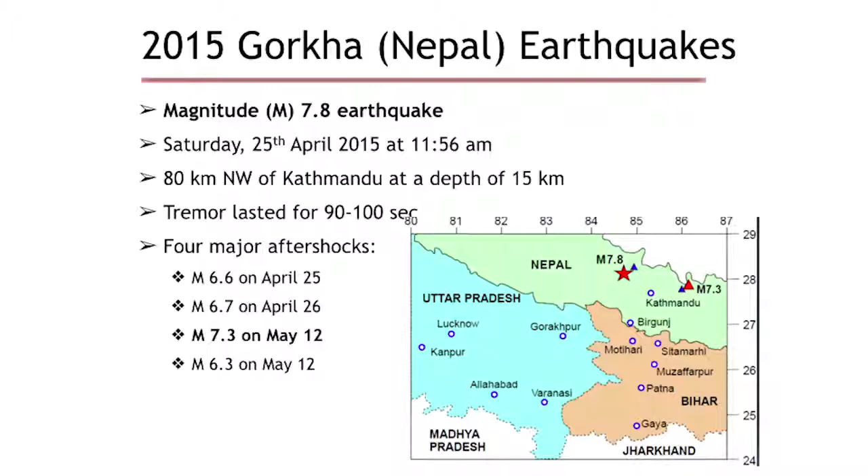And talking about the magnitude here, this is Kathmandu, the capital city here, and the major earthquake, the first earthquake is there, and then all the areas ruptured, and then the second major aftershock is there, 7.3, which is northeast of Kathmandu, again with a similar distance.

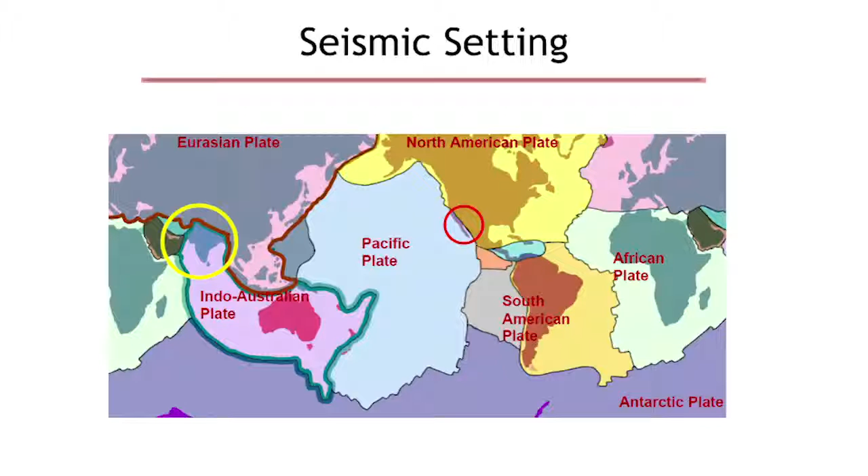Talking about the context, or in terms of seismicity, Nepal lies in the plate boundaries between the big plate of the Indo-Australian plate, which is very active and moving towards north, and it converges with the Eurasian plate, which is relatively stable. So there is a collision there that creates earthquakes, as we have here in British Columbia, with the Pacific plate and North American plate, where we are expecting a large subduction earthquake. It's a similar setting here.

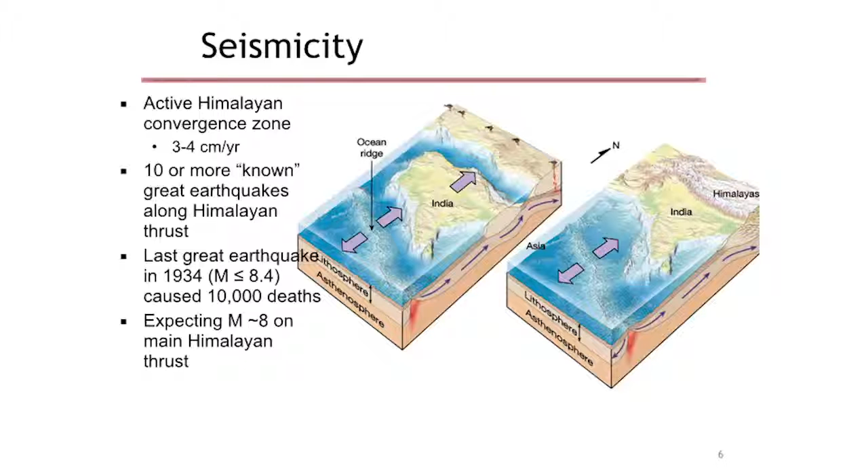And if we look at past earthquakes, yes, there is a history there. In the last 8 centuries, there are about 8 major earthquakes exceeding magnitude 8. So that means, yes, it's an earthquake zone. But compared with other areas, for these large earthquakes, it's very high consequence and a little less frequent, we'd say, because a large earthquake happens every 80 to 120 years. And exactly in 80 years we had this one, because the last one was in 1934, killing almost 10,000 people that time.

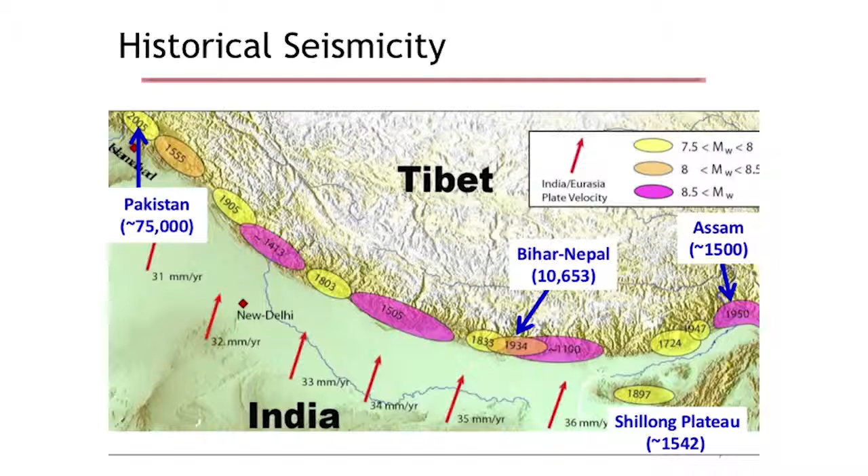And you can see that whole range of the Himalayan range here. You can see earthquakes from the 14th century all the way to the last one in 1934, where Kathmandu is close by. This time the earthquake happened again in the same area, partly filling the gap, but overlapping with the 1833 earthquake rupture area. Still, there is a large area remaining untouched for the last 500 to 600 years. So that means it's not the last earthquake. It could happen again, the big one there.

Just talking about Nepal's geography and demography here: the whole country is divided into 75 districts, and out of those 75 districts, 31 districts are affected by the earthquake, and out of that, 14 districts are severely affected. Among that, 7 are hit hard in terms of casualty and lots of damage. Kathmandu, the capital city, was not in the very highly affected area, but still, being an economical and cultural capital, it was hit hard by the earthquake.

More casualties are in Sindhupalchok and Gorkha districts, where our mission has been to see the damage and to talk with people there.

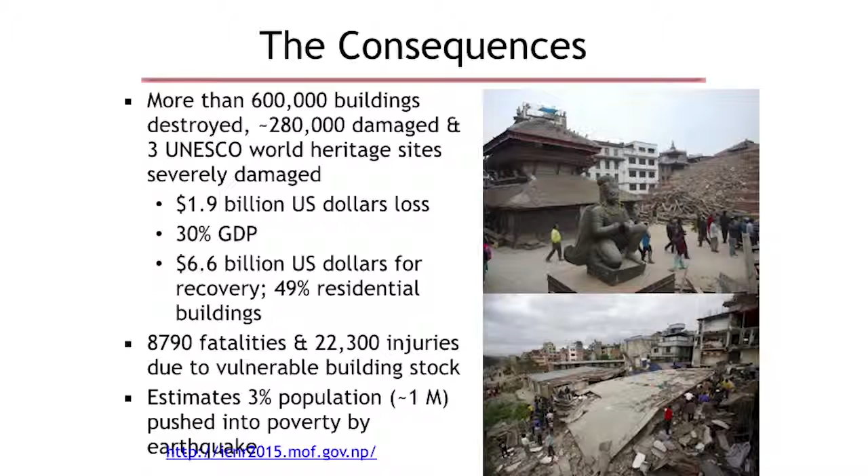In terms of consequences, yes, when it comes to casualty and also the percentage of GDP, it's very high. The economy of Nepal is very small, so even if it's $1.9 billion direct loss, that's still 30% of GDP. In terms of population, 3% of the population is expected to fall into poverty just because of this earthquake. And when it comes to population relative to the size of the country, it's as small as 1/5 of BC, but as big as Canada in terms of population, almost 30 million, close to 28 million. It's a very crowded place, so when an earthquake happens right there, the exposure is very high.

You can see the damage to the infrastructure, the heritage structures there, and damage to concrete buildings. In emergency relief, it was a very hard task for emergency responders because of the topography and the nature of the landscape there. It has high mountains, and the earthquake happened in a very high mountainous region.

So it is so hard to bring all the emergency supplies to people in remote areas. There are a number of places which don't have any access to road, so all the relief materials had to be airlifted by helicopters. That was the only means.

But still, the resiliency of the system is that the army, police, and civil servants reached almost every village within a week. The community itself had their own set of mutual help, self-help, cooperation and trust and confidence building. There was no major secondary human kind of looting or anything that we have seen in other parts.

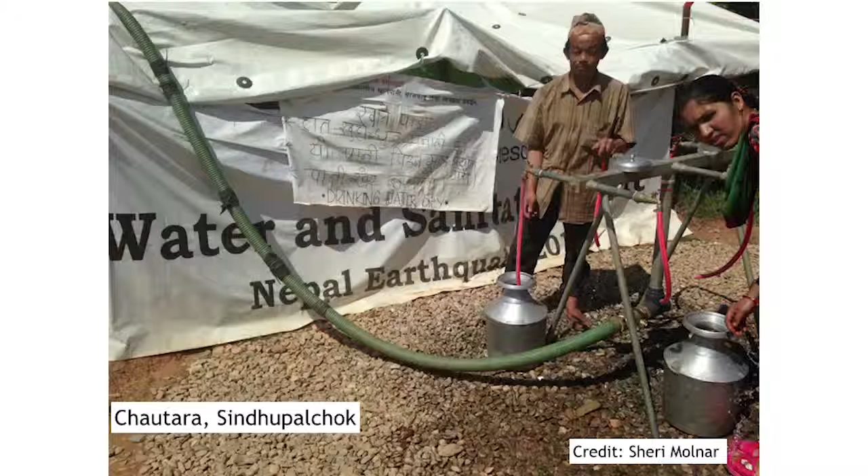You can see that drinking water, and it is written in Nepali. I can read it, and it says that this water is just for drinking. Water is not available for anything else. So that is the situation.

That was the scene that we have seen, and now we want to go to the building constructions and other damage here.

Thank you, and pleased to be here and have the opportunity to share a story from first-hand experience being in an earthquake. This is not the first earthquake I've been to - I've been to a few, most recent one. Before this was in 2010.

I went after the magnitude 8.8 Chile earthquake, and the scenes I've seen in Chile are very different than the scenes I've seen in Nepal. The extent of damage - even though it was an 8.8 magnitude earthquake, only 520 people died. I visited the damaged area extensively, but it was nothing like Nepal.

Also talking about building construction, I just want to say that going after an earthquake, there are aftershocks, and in fact they had been expecting to see an aftershock of magnitude between 6 and 7 once again, before within a 4-month period. So we were there after a month and a half, and we could have experienced that.

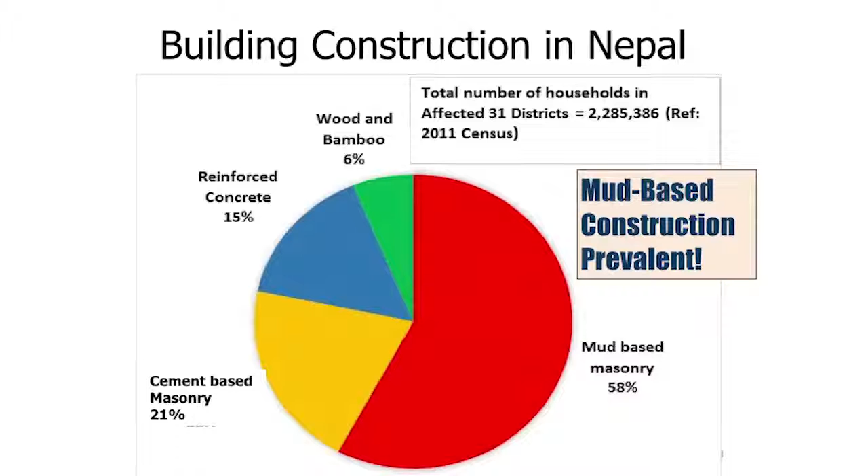Talking about building construction in Nepal, most of it is, as you can see here, information from their census. The way they classify the census is you can see cement-based masonry and mud-based masonry. What it all means is just the type of mortar in masonry. It's not that mud-based masonry is all adobe or mud-based block masonry construction, but it means that they are mostly with mud.

So taking that cement-based and mud-based masonry, you can get that 80% of construction is out of masonry one way or the other, and then 15% is reinforced concrete, those modern buildings that Bishnu will be talking about later, and then wood and bamboo, more traditional construction, 6%. So mud-based construction is obviously prevalent.

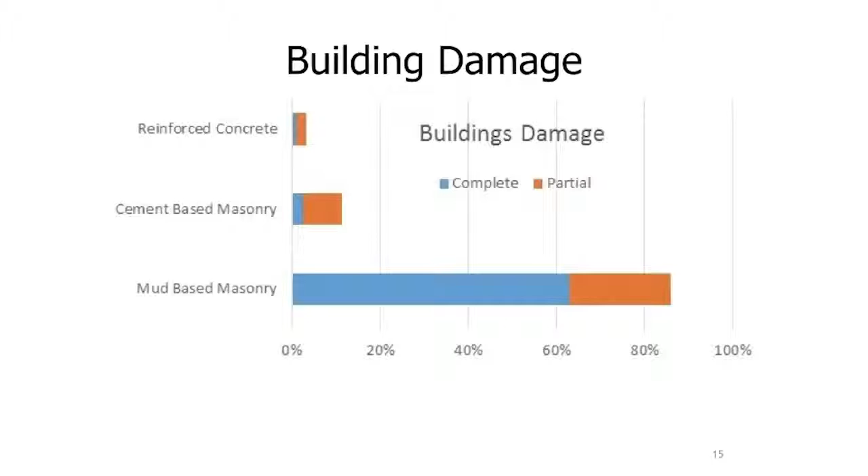Talking about the damage to this type of buildings, mud-based masonry, you can see blue lines show complete damage, and orange or brownish partial damage. You can see prevalent damage or collapse in mud-based masonry, much less in brick masonry or cement-based masonry, that means more modern masonry construction, and then a little bit in reinforced concrete, much less than either of the masonry construction practices. So that is what we have seen.

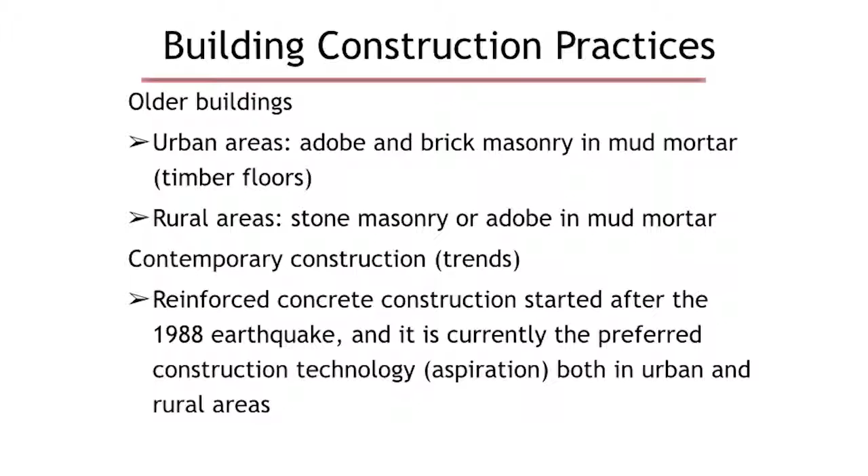Talking about practices, what we could see by visiting towns and villages is that most of the urban, older buildings, in urban or old urban cores, such as downtown Kathmandu, you can see adobe buildings or brick masonry buildings in the cities. If you go outside in those hilly areas, these are stone masonry because that's all they have. They have nothing but stone, and that was the major culprit in the earthquake. And then there's a prevalent trend everywhere where there is cement available and steel to use concrete construction, in most cases inappropriate and not in a very knowledgeable way. So that is what we could see.

In terms of building codes, before I show you some photographs of damage and explain them, building codes were first introduced in Nepal in 1994 in response to the 1988 earthquake, which Bishnu didn't show on that slide, sorry, because it was not as strong. That slide showed magnitude 7 and higher.

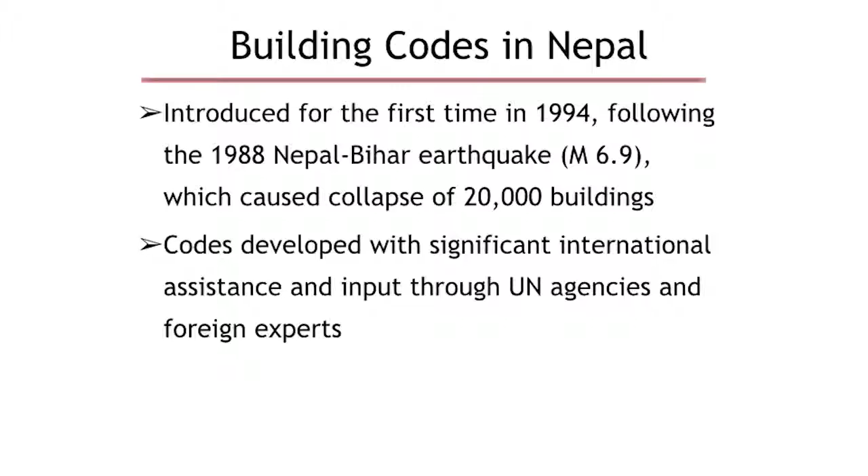This was 6.9, however, it caused the collapse of 20,000 buildings, and it turned out that concrete buildings performed better, and therefore whoever could abandon masonry buildings or build new buildings, they would use concrete construction without proper guidance or codes. So in 1994 they introduced codes, and they were mostly introduced with the help of foreign experts and the United Nations, and they were never renewed or updated until 2015.

Also, even more importantly, they were not implemented. They were not enforced in most cases. So by looking at the concrete building, it doesn't mean it was done according to a code. You only know it is a concrete building, and because it was already constructed, you also don't know how it was constructed. So it's lots of unknowns and very difficult to assess performance, unlike Chile, where you know if the building was done according to the code.

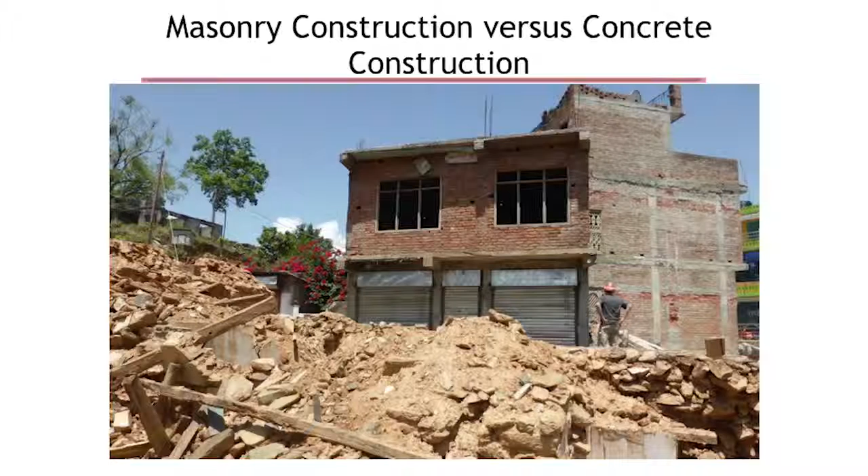So what we could see mostly in terms of performance of masonry construction versus concrete construction is that we could see lots of scenes where concrete buildings withstood and then masonry was damaged or collapsed, as a typical scene.

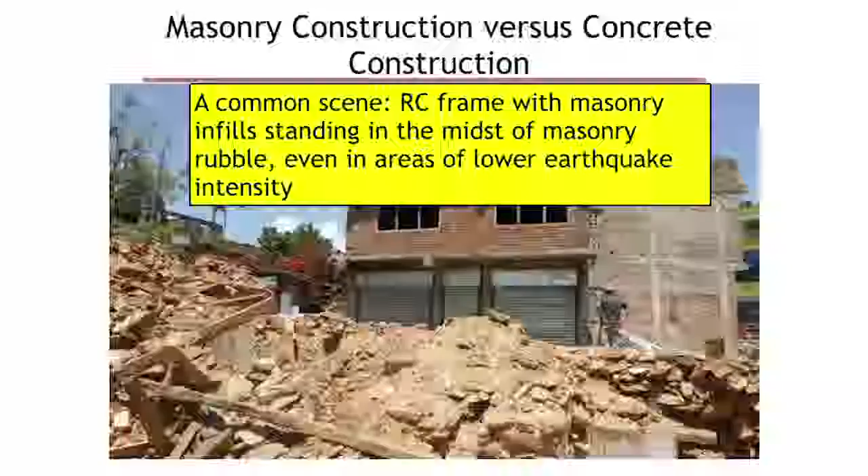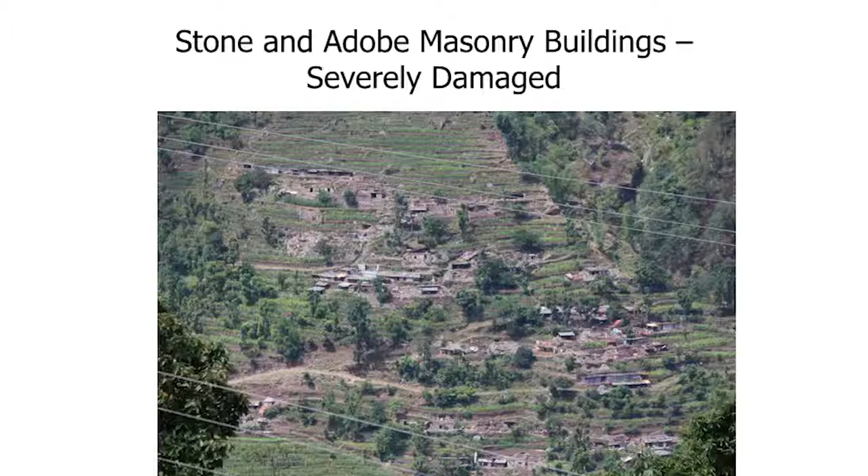Then also in the rural areas where we went outside Kathmandu, this was a typical scene, and this is the photo that we took, but there were much more dramatic photos. It's complete devastation of the villages. You could just see piles of masonry, of stones, instead of the buildings or the houses. So it's horrible.

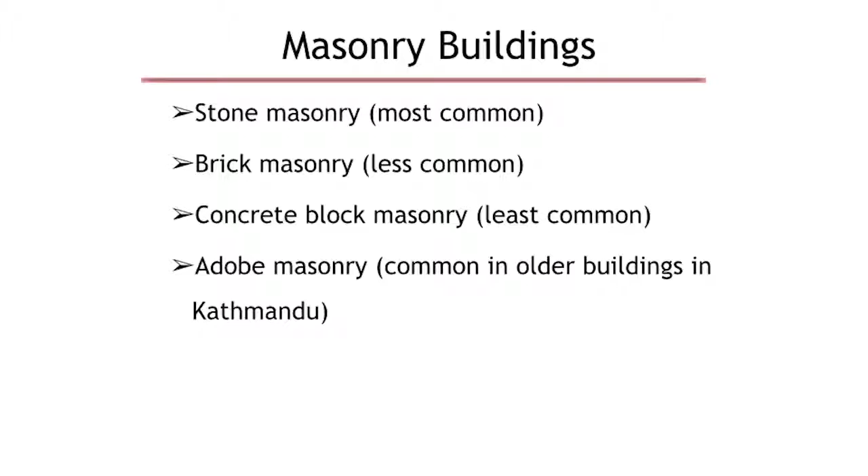So masonry buildings, as I said, stone masonry, I will talk about that, most common in the rural areas. A little bit about brick masonry, and concrete block masonry, less common, and adobe - I'll not be talking about that because most of them actually collapsed. So in terms of stone masonry housing, this was the most prevalent rural construction practice in Nepal.

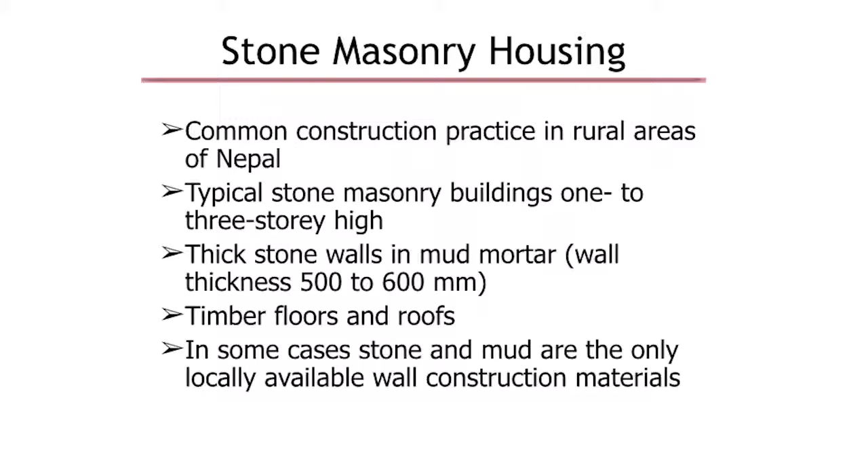Typically 1 to 3 story buildings. You can see how they look like. This is a typical well-built stone masonry building, and it survived the earthquake obviously. You can see pitched roofs, light roofs, which is good. They have some metal roofing usually, and timber floors.

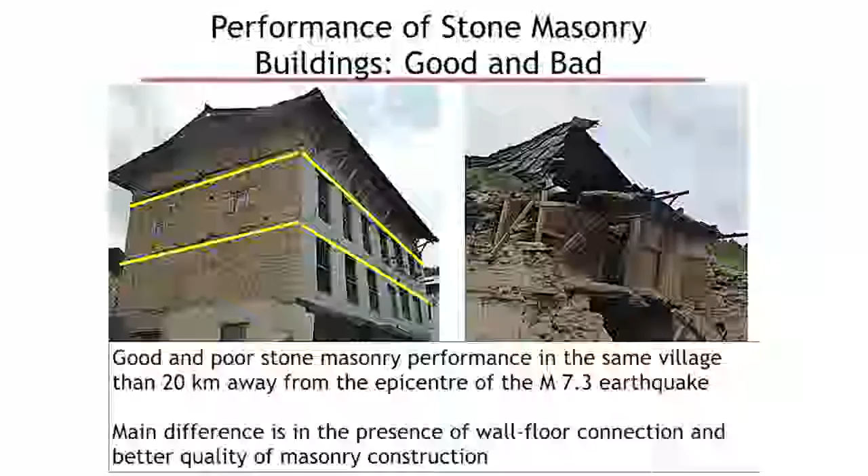I think I should keep speaking to this somehow, the voice is not clear all the time. So this is a timber floor, as you can see. So they don't have too much of a diaphragm action, which means something to earthquake engineers. And inside the floor, you can see the planks and system.

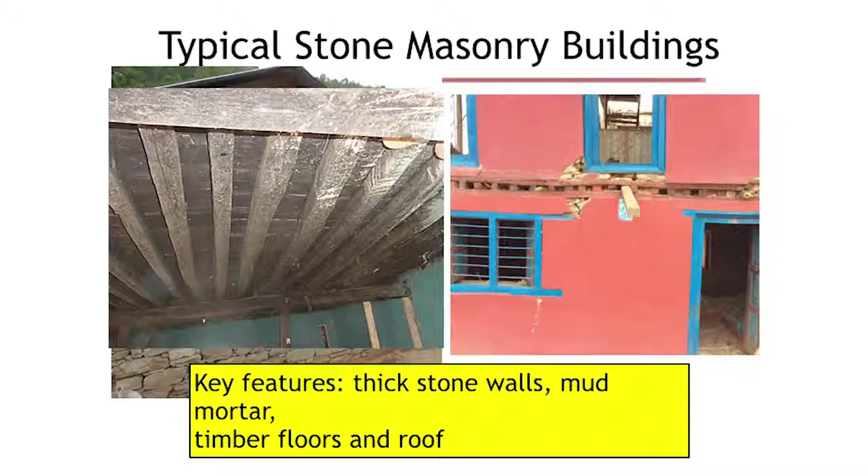So we could see both good and bad performance of stone masonry buildings. One would think with this type of construction you could see all collapse, but we have also seen good performance. For example, this is on the left side, you can see a building which, they're in the same village.

They were very close to the epicenter of the second earthquake. The one that had timber elements, like ring beams, which was a traditional practice for many years, performed quite fine, and we've seen other buildings like that. Whereas others built more poorly without those elements collapsed or were badly damaged. So, taking us back home, we do have similar stone masonry buildings.

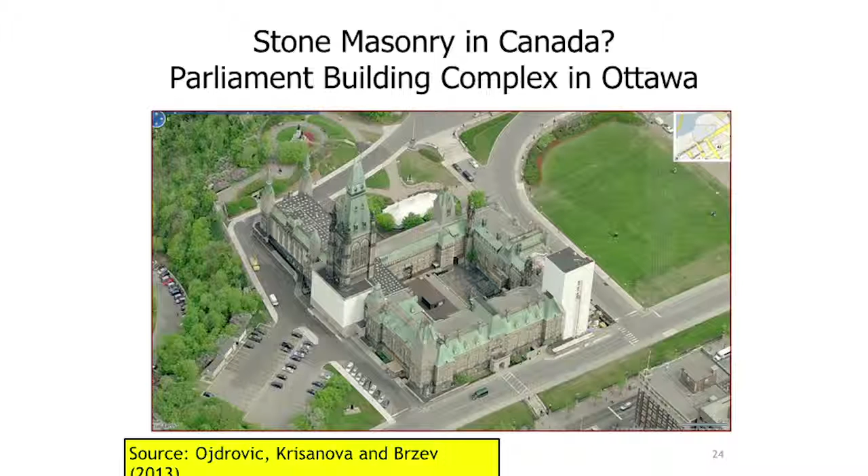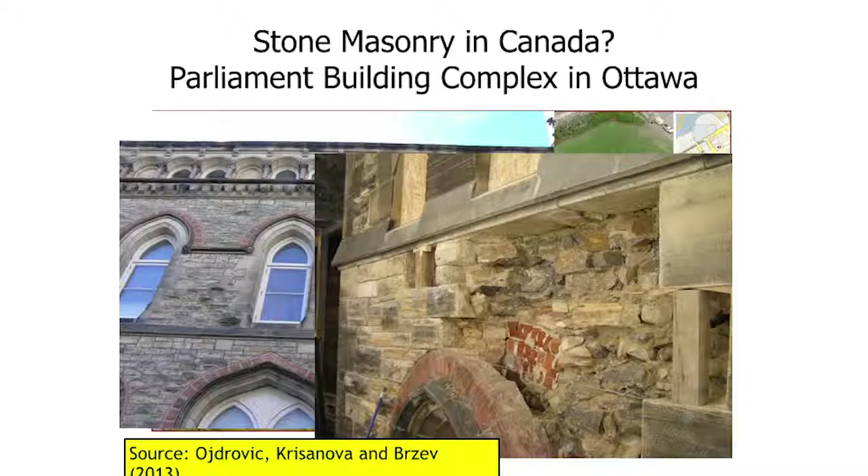They look much nicer though, and more monumental, like the Parliament building in Ottawa. But when you look inside, I was working a bit on reviewing part of the rehabilitation project, which has been going on for many years. There are stone walls of poor quality, similar to the practice we saw in Nepal. So there is some similarity there.

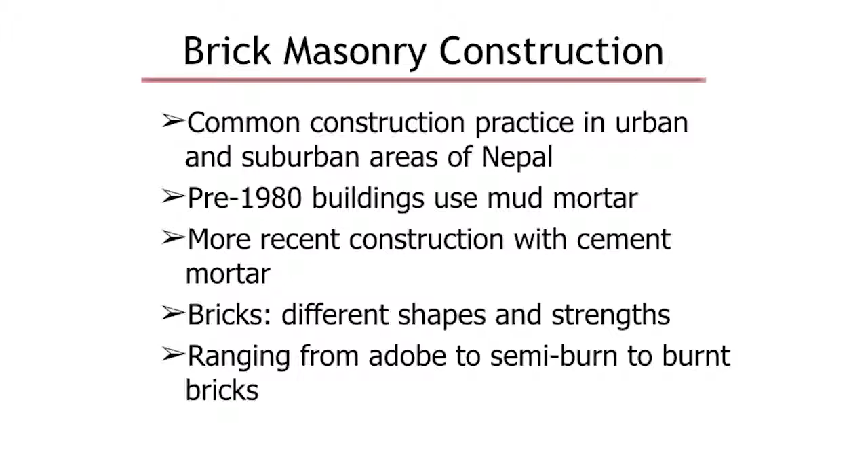In terms of brick masonry, this is similar to what we have here in older buildings in Vancouver and other cities in Canada. Mostly before the 1980s, they used only mud mortar for construction of brick masonry, which is very poor strength. After the 1980s, they started using cement mortar, which makes the masonry stronger.

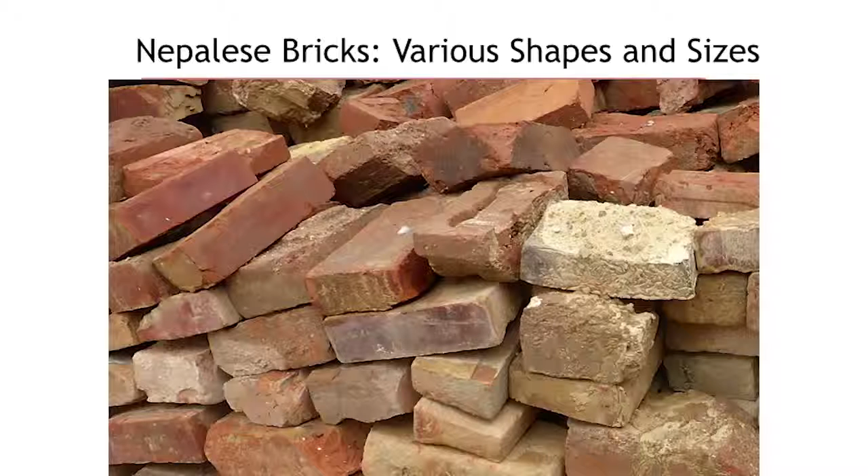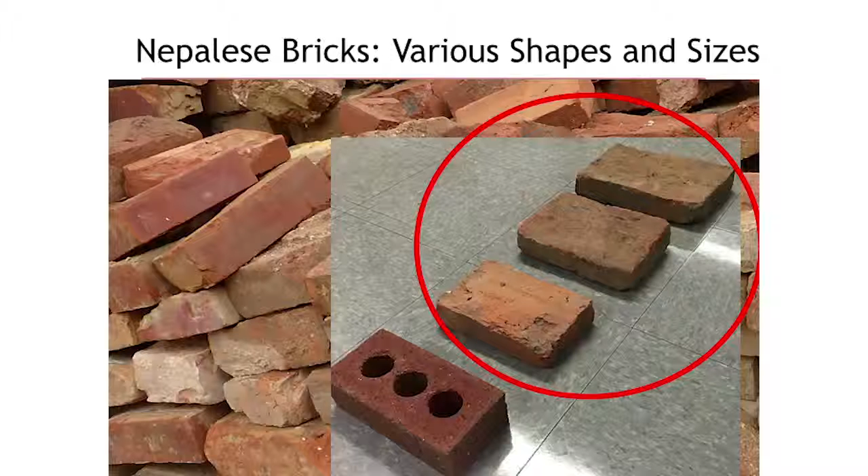Bricks were of all different kinds of shapes. As students and my colleagues know, I'm interested in masonry, and it was like a museum for me to look at all the shapes and sizes of brick masonry. I couldn't help it, so I took three of them to Vancouver. This is at BCIT, they're still in my office.

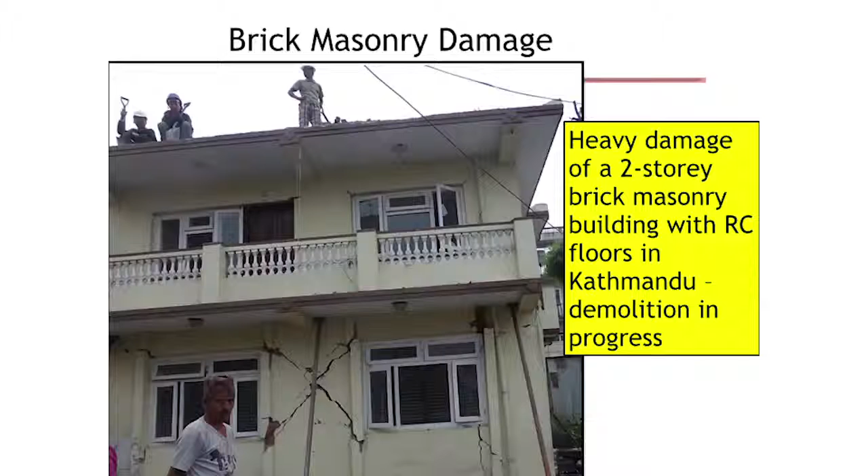They are quite different - I haven't tested them yet, but visually some strength looks okay while others look poor. We could see damage to brick masonry buildings, normally these shear cracks caused by high earthquake intensity, since masonry is a brittle material if not reinforced, so that's no surprise.

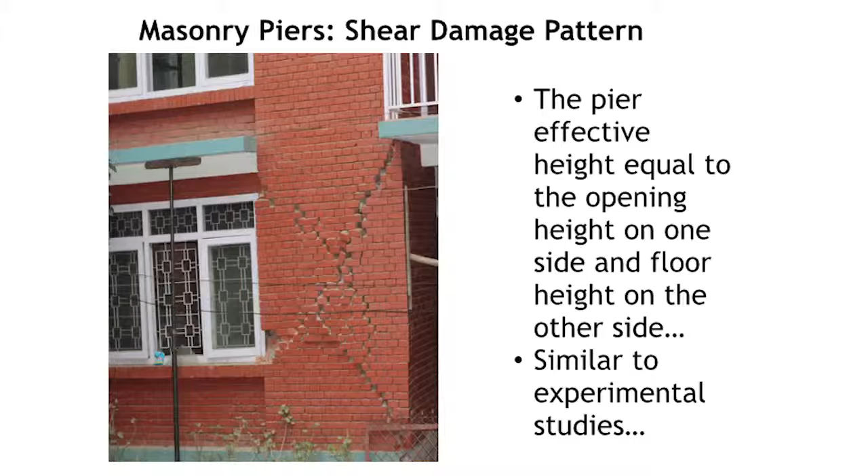In some other buildings, I believe this is a school building, you could see cracks which look very similar to cracks seen in experimental studies. So it's all confirmed - earthquakes confirm the experiments or vice versa. In any case, there weren't too many surprises in what we saw in those buildings.

We have a number of buildings of that type in Vancouver, and everywhere in Canada, and those buildings are vulnerable unless they're retrofitted. Luckily, some of them are retrofitted in Canada.

Concrete block masonry is not a very common type of construction, as you could see from what's built, but there is a trend of using that in the future. And there is a major concern because of the poor quality of blocks that we have seen.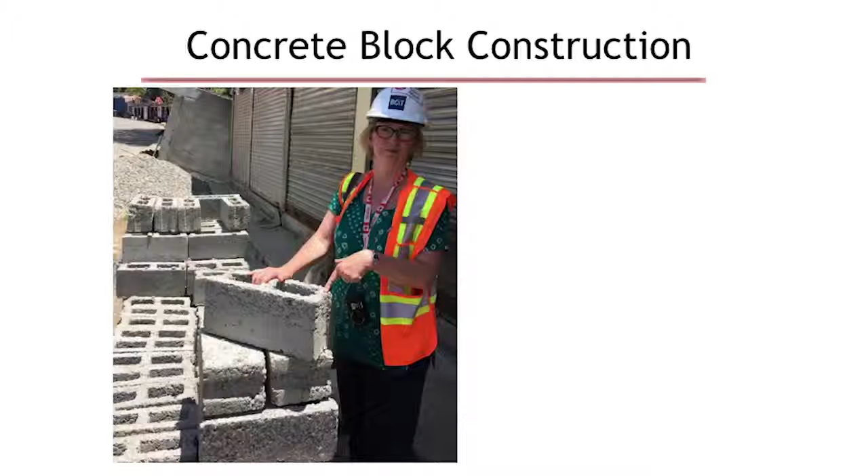This is one of the blocks, and with the help of my colleagues I managed to get one here. What we could see is that if they had a brick masonry building and were doing an extension, they're building with blocks. There's also a trend we've heard of, that they may replace stone masonry with blocks, because in areas where they don't have building materials, they could bring some cement, set up homemade plants or small facilities, and make block masonry, which could be really dangerous. So anyways, that is what we have seen.

So this is more or less very briefly about the performance of masonry buildings, and this is mostly housing that we have seen. Bishnu will be talking about schools, where we'll see again some examples of masonry, and I'll talk a little bit about heritage buildings, and then Bishnu will talk about concrete buildings.

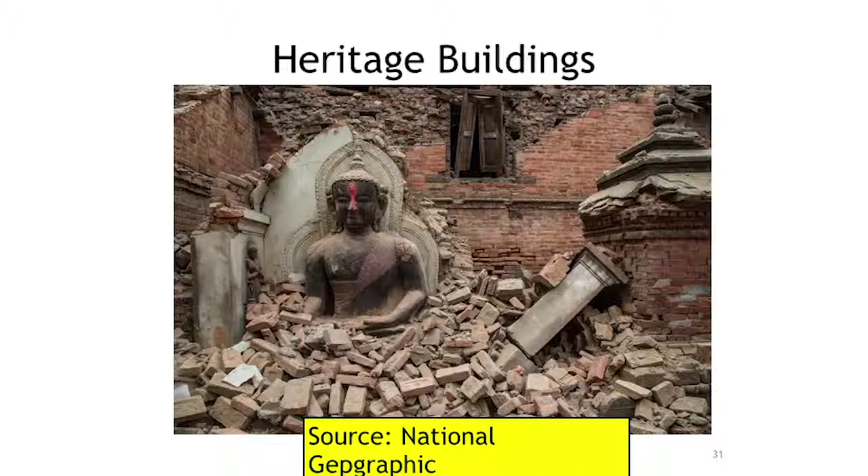So heritage is a big aspect of Nepal. Nepal's heritage is known worldwide - it is so well recognized that there are several UNESCO heritage sites in Nepal. It has global heritage value. Many of these structures were completely destroyed in the earthquake.

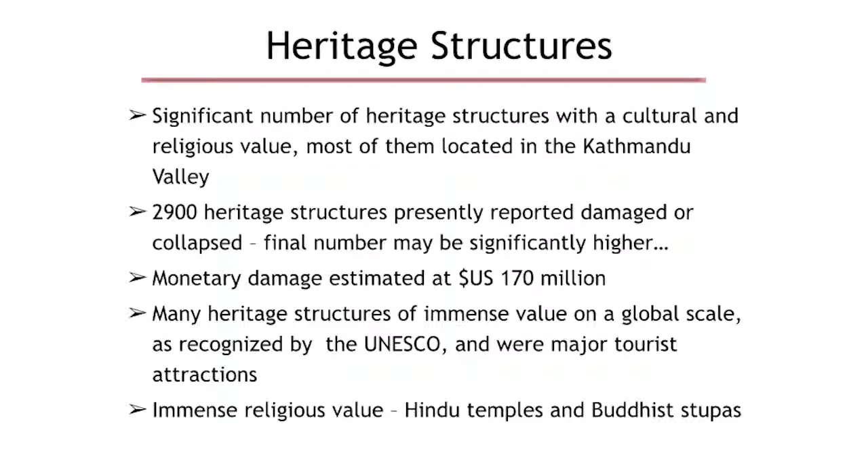Just a moment, oops.

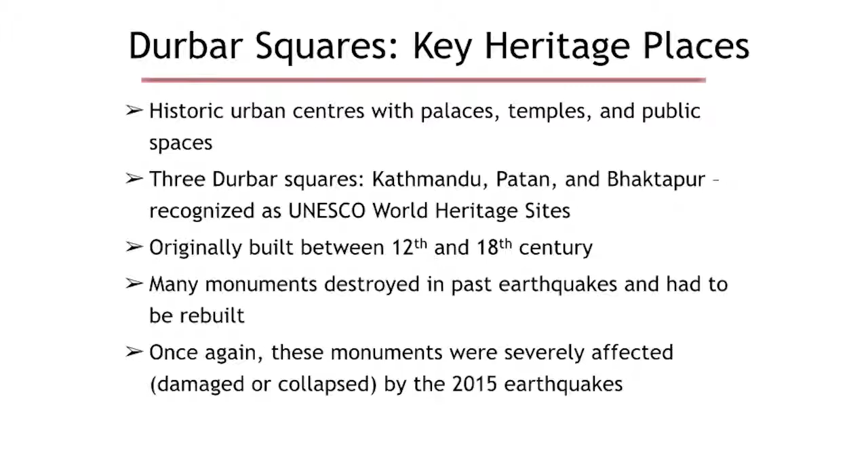What is typical for Nepal—and I don't know how many of you have been there—there are typical squares in big cities. In Kathmandu Valley there are 3 cities: Kathmandu, Patan, and Bhaktapur. They have those squares where you could see the old palace and some temples, and those are the heritage sites. You can see in Kathmandu that square, which is called Durbar Square.

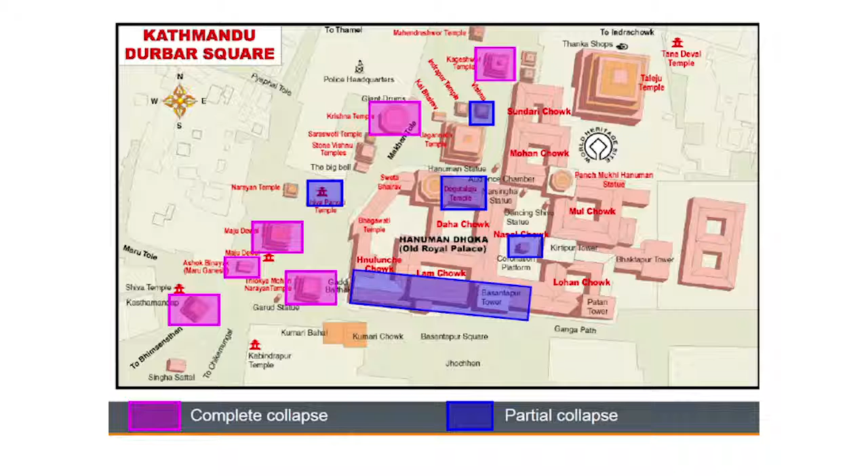You can see the pink squares or rectangles showing complete collapse of those temples and buildings, and the blue lines or blue areas showing partial collapse. Overall it looks like a very, very damaged place, and I'll show you how it looked.

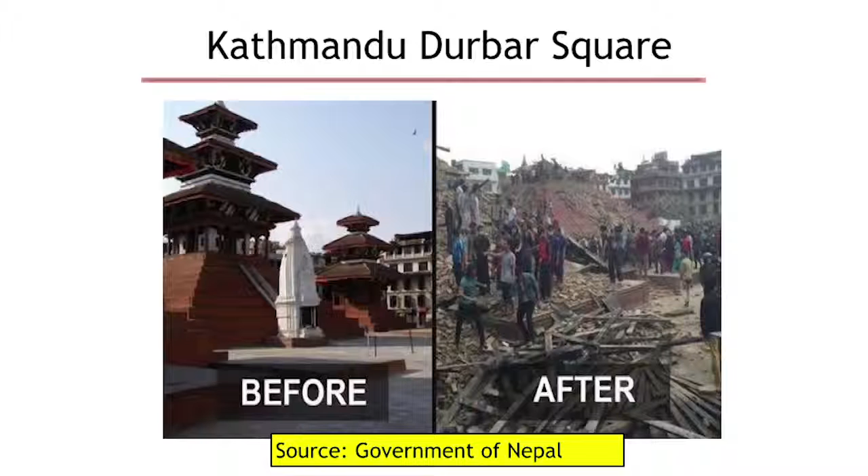So this is a scene from Durbar Square, before and after, in Kathmandu. These were the top tourist attractions for Nepal. One of the two reasons people go to Nepal—there are others for sure—one is to visit those sites, and the other is to do trekking.

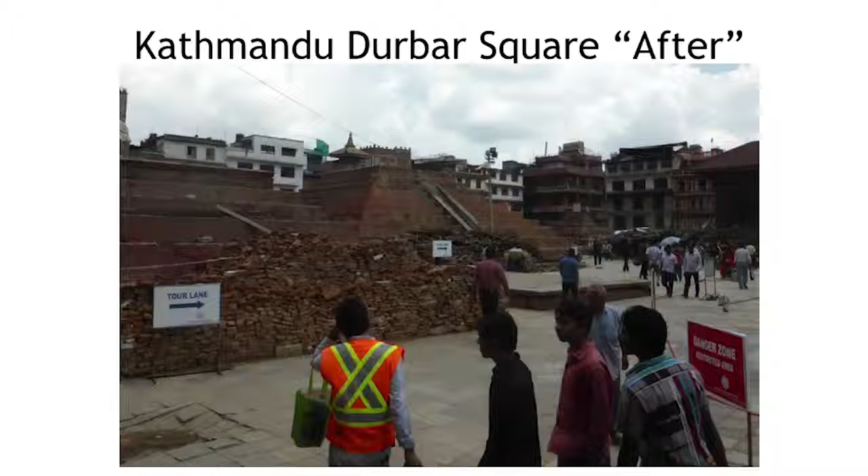So this is Durbar Square, photographs that we took. You can simply see the pedestal of the frame of the temple—the temple has gone, many temples have gone. You can see tour lanes, so touring the collapse. They still have guided tours, but what is there to see?

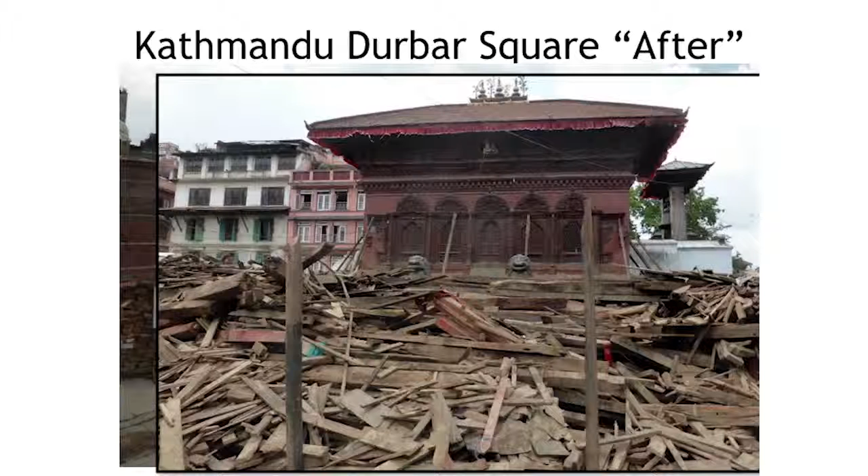Anyway, these are scenes also from the same place, all Kathmandu Durbar Square. You can see that bricks have been dismantled and kept for rebuilding, but that has to be done in a certain way. This is a palace in the back, which is completely supported.

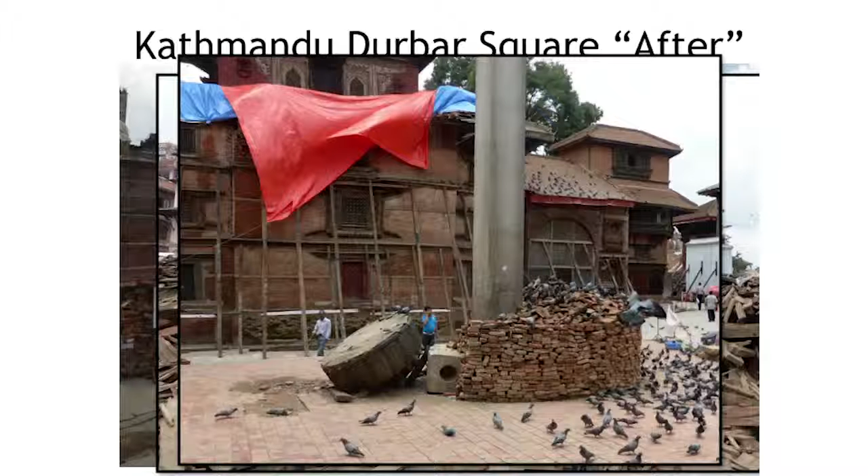This is the palace, one of the palaces in Durbar Square. You can see lots of props. However, they opened it—when we were there, this was the first day they opened it for tourists, so you could enter the palace and pay. For some time it was free, but then afterwards they charged.

And however, what we've seen is also business as usual. This temple is supported, but they keep selling things under the props—they just don't feel it. Life goes on.

We have done some studies on temples. We are planning to do some analysis of a few temples where some site period measurements were taken, but I removed those slides for the brevity of this presentation.

Talking about reinforced concrete buildings, that's a widely used construction these days. It wasn't before, but after the 1988 earthquake, as Svetlana mentioned, there's a notion that when it's concrete—a mix of cement, mortar, and water—it makes a magic. It is a magic, but whether all the implications of that mix are properly done or not, they don't know. They just assume that whenever it's concrete, it's done. That's what causes a lot of concern.

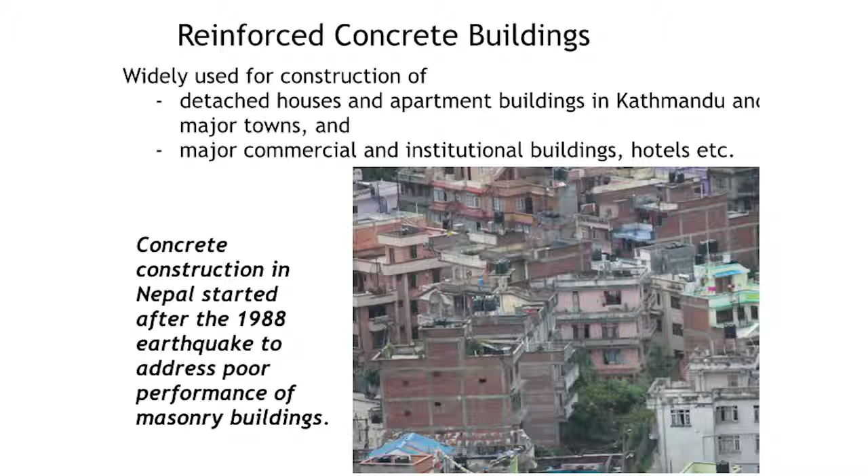Here you can see this residential area with lots of reinforced concrete buildings. It looks like masonry, but everywhere you see concrete frames here and there. That's not only for residential buildings but also for major commercial and institutional buildings. They don't have steel buildings or shear wall buildings, but basically reinforced concrete buildings with masonry infill—that's the most common one. It's all shifted; if we try to find a purely masonry building now, it's hard to find. The shift of construction is all toward reinforced concrete with masonry infill.

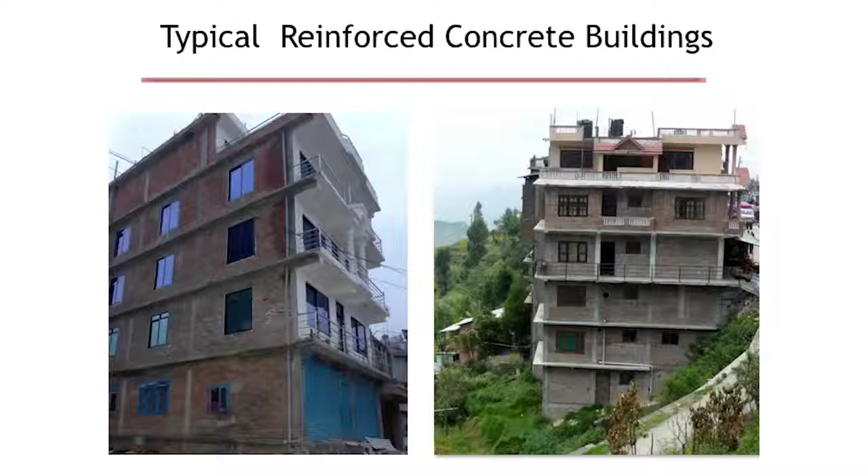When it comes to reinforced concrete buildings, typically they should be, per guidelines and codes, a 3-story building with a simple regular system. But with the need, they go to 6 or 7 stories, with the same column size and same beam dimensions that used to be for a 3-story building. And when it comes to seismic detailing and others, yes, we will discuss that—that's a major factor.

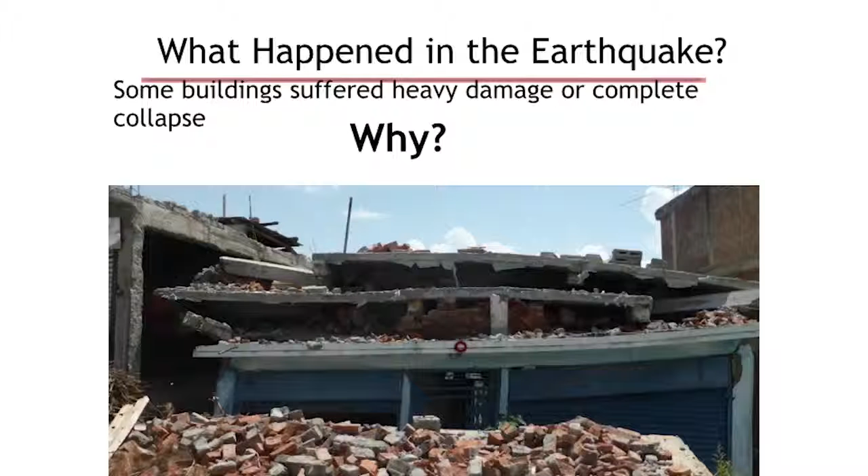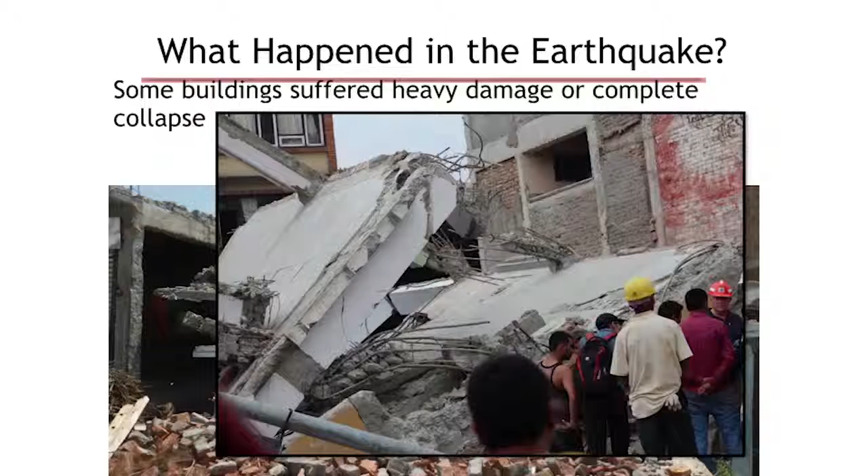What we've seen in Kathmandu—some buildings we saw going from the airport to the hotel had not much damage. We saw buildings standing there fine, and all of a sudden there's a completely pancaked building, and then on another block there's one building about to be pancaked. It's really interesting to go through that observation and see why that caused that kind of situation. I didn't have much time to talk about the motion, but the real acceleration motion that we talk about a lot when it comes to force—that was very low.

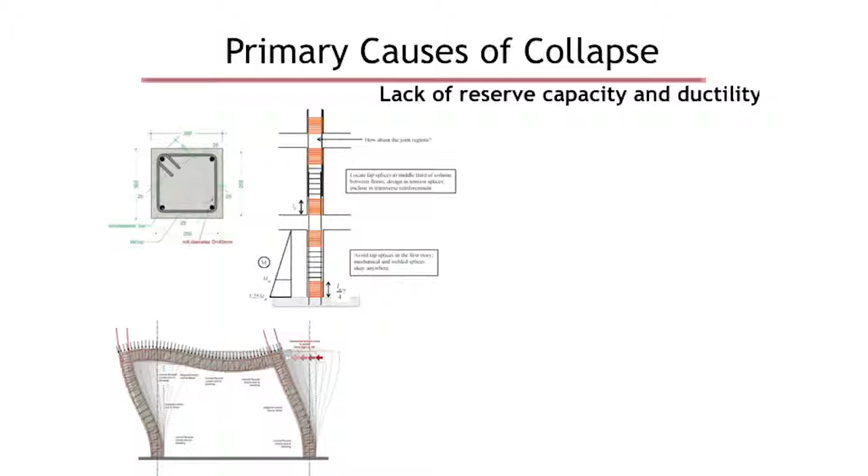It's just 15% of G, or with the design code value, it's just 1/3 of the value. That means with that 0.15 of G, there shouldn't be any damage to reinforced concrete buildings. But then there is damage, and also no damage in some cases. That means why did that happen?

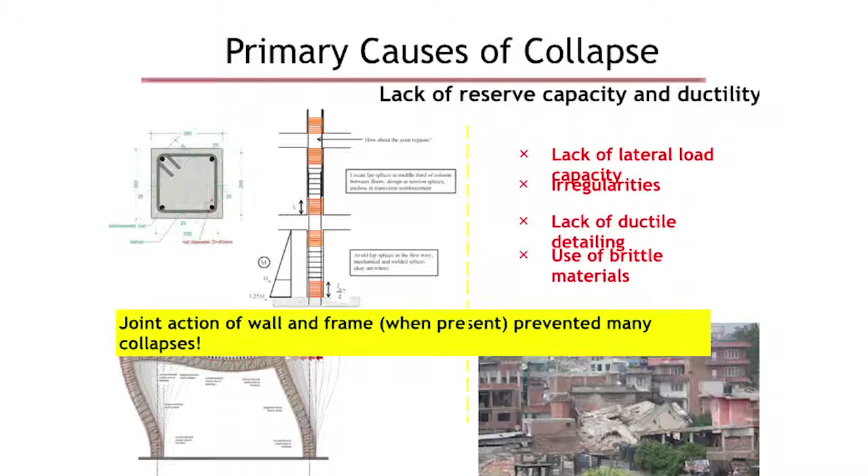The culprit is basically the detailing, and also the wall, the masonry wall, which is not actually regarded or considered in the original design and construction as working as a shear wall, but it works that way.

When it comes to proper detailing, proper seismic detailing, we know what ductile detailing is for an earthquake resistant system, and frame buildings should behave like this: it goes to large deflection, is still standing, and has reserve capacity. But when it comes to construction in Nepal, all of a sudden you can see some buildings are surviving while one is going down.

What happens is that it has a threshold value. Up to that threshold value, there is nothing, we cannot see much damage. But once it reaches there, there is no reserve capacity. It's a brittle failure and it's just gone. That is a lack of lateral load capacity. Up to that point they stand, and that's all due to the fact that they have a wall, which is not considered in design, but thankfully that protected a lot of buildings, because the earthquake was low.

But still some buildings surpassed that load because they constructed a 5th story, 6th story, and all of a sudden it goes. Another factor is irregularity, and again that is because of the wall.

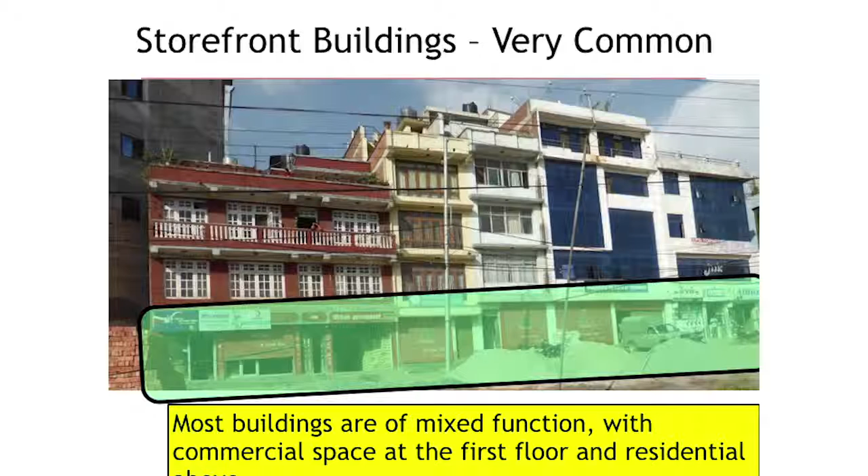They put the wall in a regular fashion, okay, that's fine. But when it comes to buildings with storefronts, you can see that the storefront, the retail store, doesn't have any wall. But for engineers, for construction, that's a frame building, why should I put a wall? And that's a common consideration from the engineer's point of view.

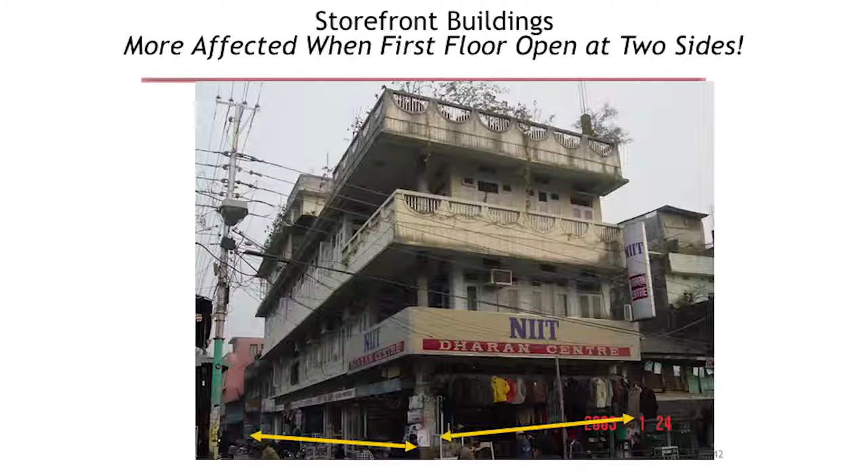But that's where the culprit lies, that avoidance of the wall. And particularly in this earthquake, hard hit are these kinds of buildings where two sides are open and two sides are blind. What happens in an earthquake is that with the two sides standing, it just twisted. Also, because the wall is absent on two sides, the capacity to resist the whole 3, 4, or 5 story building is not enough.

And that's where we could see there are lots of buildings like this, but then all of those buildings completely collapsed.

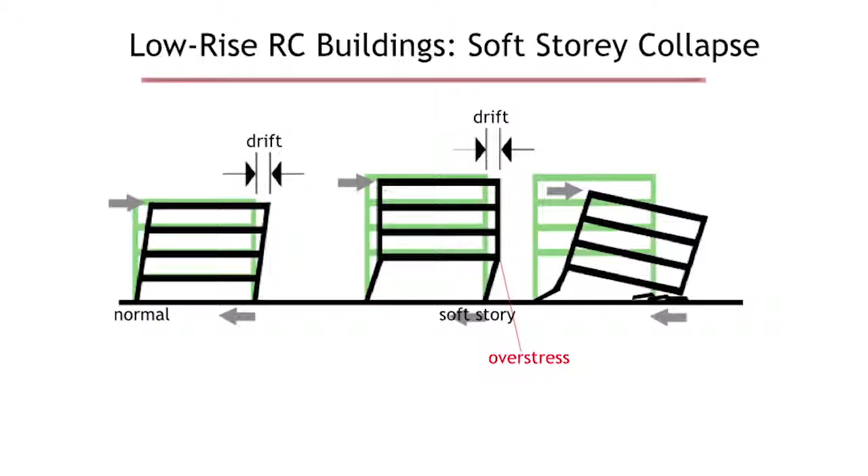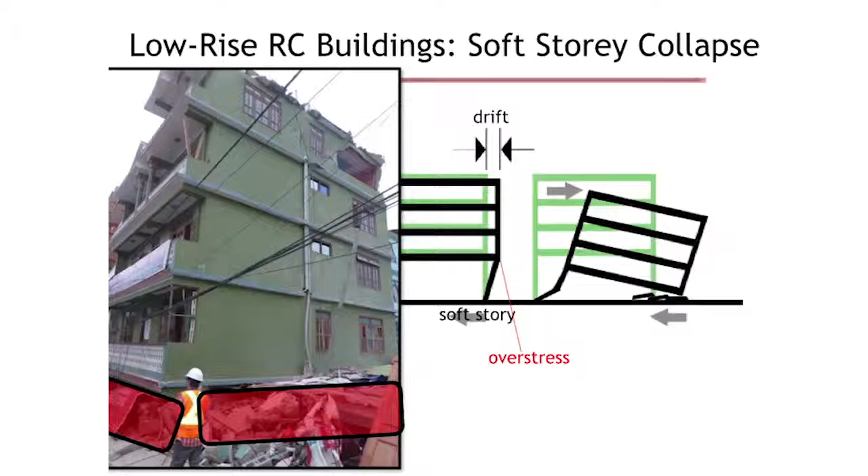It is a simple phenomenon, called soft story. The first story is weak for a number of reasons, one being the absence of wall, because the wall acted jointly with the frame in that system, and now it's absent, which overstresses the particular column without wall, and then it goes into pancake collapse. That is what happened here in these buildings on two sides, and that's where it could not resist and just pancaked.

In many of those buildings, we did not even see any damage distribution in the upper stories, just the first floor pancaked, and that's it. That's a very common phenomenon.

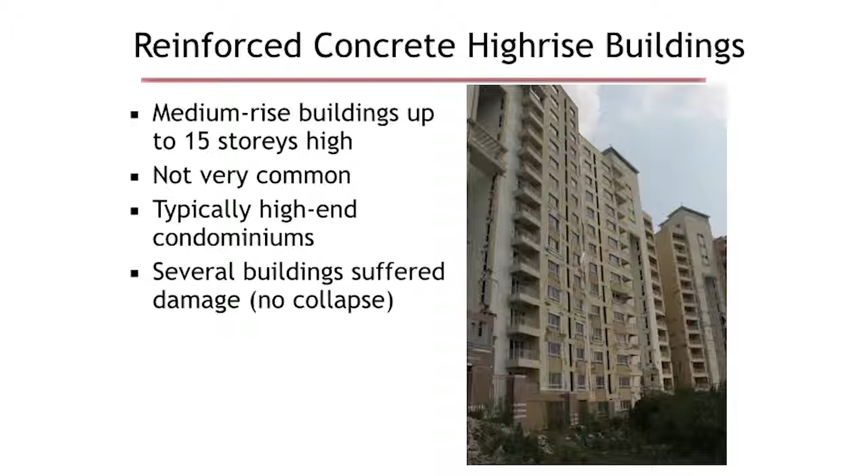When it comes to high-rise buildings, medium-rise buildings up to 15 stories high are not very common, but just in the last decade they've been growing a lot, popping up everywhere in the city, and there is no collapse, but there is huge damage. We cannot see much from here, but if we look closely, there is a huge amount of non-structural damage.

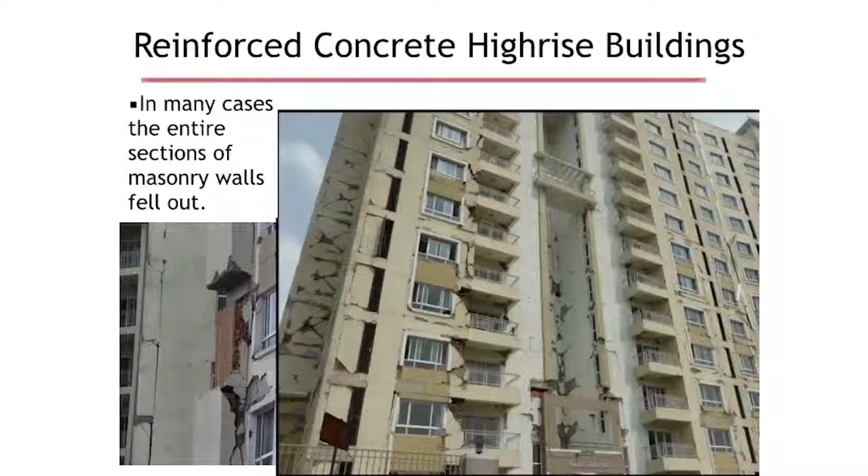Again, those unreinforced masonry infills are not able to handle the large displacement coming from that earthquake, which is very unique. It has very low acceleration, but very high velocity and displacement, which is detrimental to those kinds of walls and high-story buildings, because the displacement demand is very high.

So you can see the close-up there. It is not usable anyway, those high-rise buildings.

When it comes to school buildings, that's where we included school building because it's among the hardest hit. In those districts, the hardest hit districts in Nepal like Dolakha, in some districts 100% of schools collapsed. No schools there, so it's a huge loss. I've been working in this field protecting school buildings in Nepal and other countries in Asia Pacific, and also had a chance to work on the school building guideline here in BC.

That's where I spent my time later, after this mission was over, almost 2 months, going to schools to look at what we can do. The school is also a means to provide different structures or technology to the community, because there is no formal mechanism of technology transfer to the community. The school is the one network we can use for that.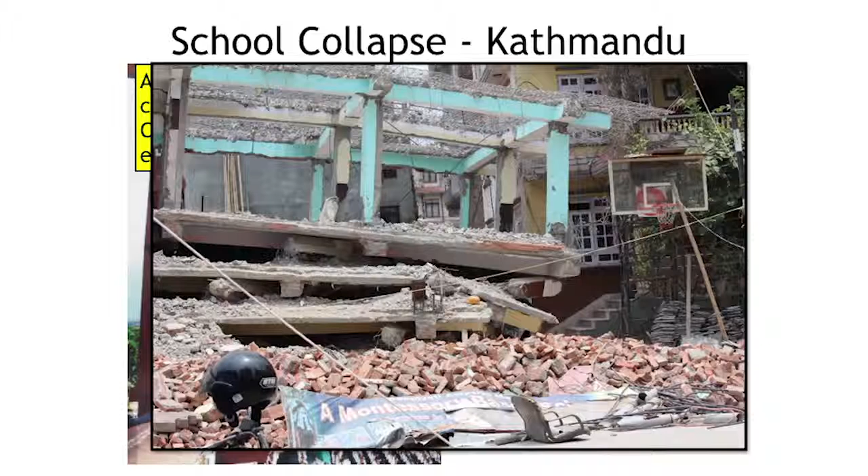The situation is like that. They are still, in their hearts, trying to go on with life as usual, but definitely it's not usual.

For the focused study on school damage, I went to a number of villages and districts to do proper physical damage assessments, and also tried to interact with local technicians, carpenters, masons, teachers and the community as a whole - to understand not only the damage itself, but how we can rebuild, and what is the best way to have better technology for reconstruction of schools.

That's where the group meetings happened, here with the principals and teachers. With the damage assessment, the finding is that retrofitted schools with simple measures, or schools designed properly with simple measures like bands and others, work perfectly.

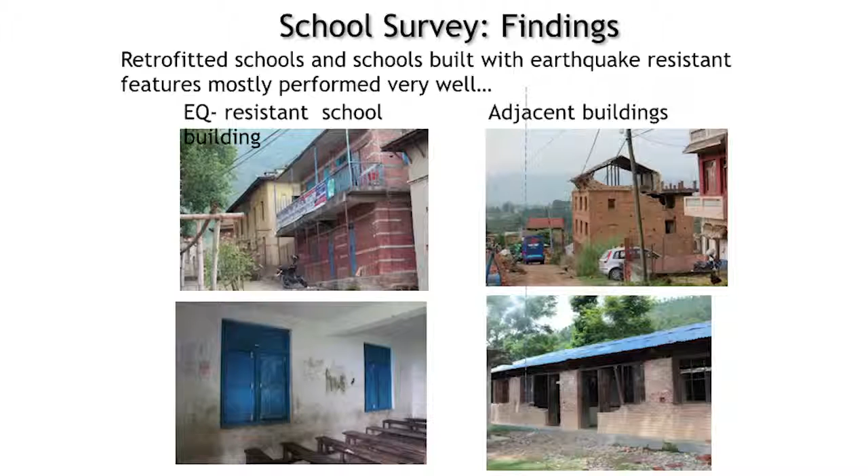This school here, in the corner, is right next to those adobe buildings, and that building was a retrofitted one. It's an adobe building, retrofitted, that survived without a single crack. It's wonderful to see that.

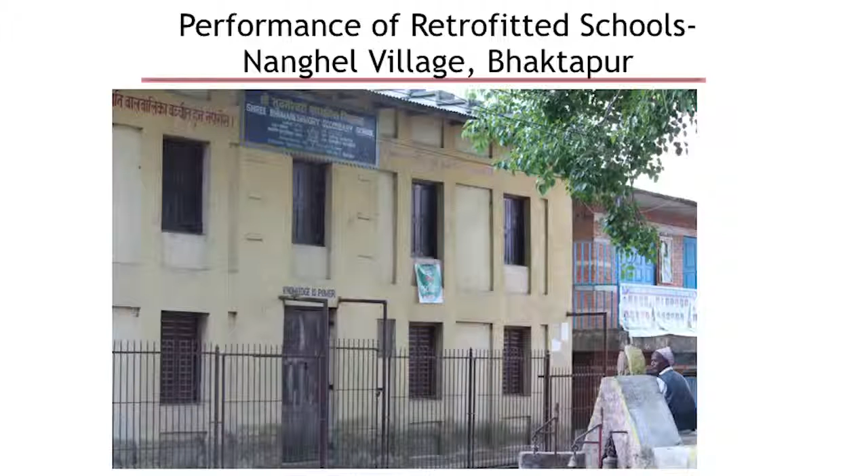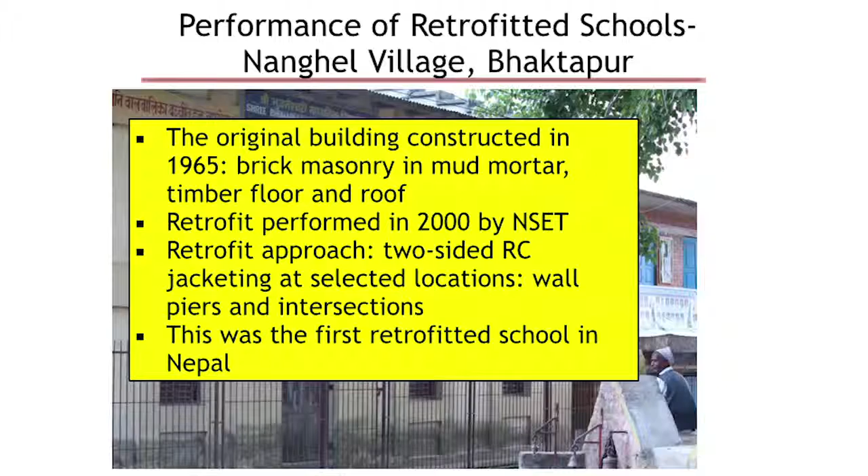Talking about that building, I want to go into it more because I was in charge of that retrofitting design and construction back in 2000. The first thing, that Saturday, I called the villagers there and asked what happened to that school, because it was right in the middle of adobe construction - it was adobe construction, and we challenged ourselves: okay, we can do retrofitting also for adobe construction. And it went well, no cracks.

So that means - that school was actually the first school retrofitted back in 2000, and that school was not only first in Nepal but in the whole of Asia - the school retrofitting program started with that school there.

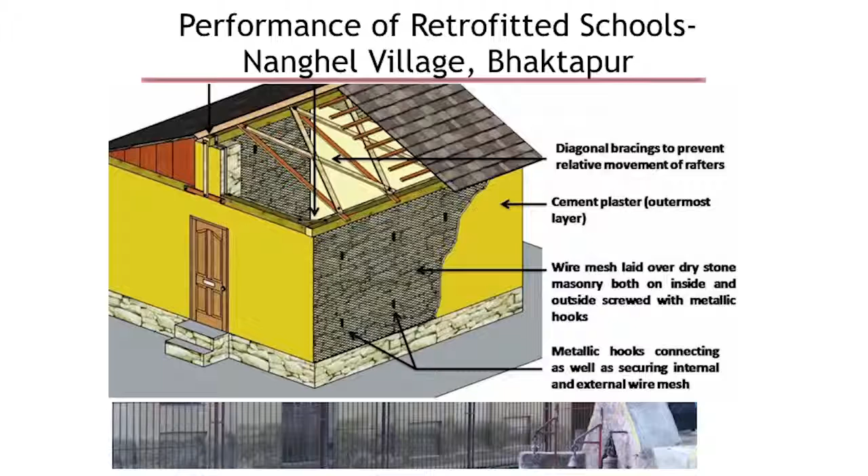The technology is very simple. You can see the simple jacketing from inside and outside with mesh and micro concrete, putting all the anchors inside and out with staggered spacing, plastering inside and out, and changing the diaphragm - a flexible diaphragm replaced with a small concrete topping, making it rigid. That's it, and that worked well.

Does that mean that simple technology, or retrofitting in name only, always works? No, it does not work. Look at this one - this is before, done by one major INGO from the US doing school construction worldwide. This is after: completely flattened. The simple reason is there was no technical oversight - one engineer gave a design and untrained masons implemented it, which is complex. Design is not that simple, and construction is even more critical, because an earthquake doesn't recognize design, it only recognizes construction.

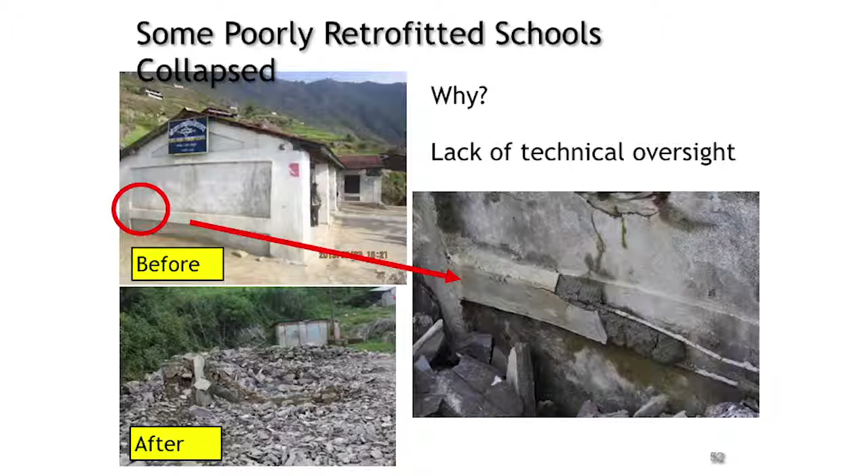We should have proper training, capacity building, and oversight. You can see that corner - it looks like it just peeled off. All the reinforcement bar that was provided there just peeled off. Where is the retrofitting? How is that force transmitted to the reinforcement? Nothing there.

So we put that report out, together with a professor from Western Washington University and one colleague from the US. It shows the strength of retrofitting and some weaknesses, some lapses, in that program which has already retrofitted 300 school buildings in Nepal, which has some relevance for us since we are also under a retrofitting program here.

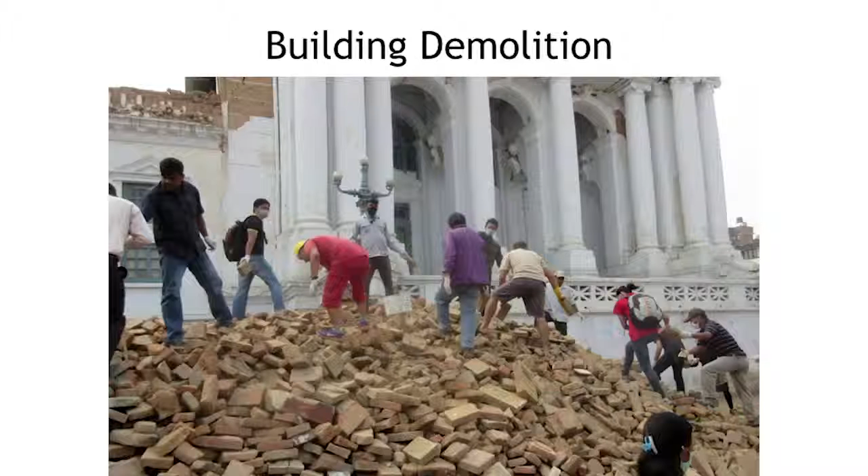When it comes to building demolition, it is really demolition and deconstruction. Deconstruction was started there, and demolition is particularly hard for reinforced concrete buildings because there is no mechanized system and no equipment. So people are doing the demolition manually by hand - concrete slabs, reinforcement columns, everything. That was hard to see.

You can see some of the demolition there, and they are using that material for the reconstruction - they are already keeping it. So it's not just demolition, it's deconstruction for reconstruction. They are keeping those materials there.

You can see that is a school building again, and that's what they are doing manually, hammering it up. It was challenging, and they are keeping those materials in a safe place so that when reconstruction comes, they can use it.

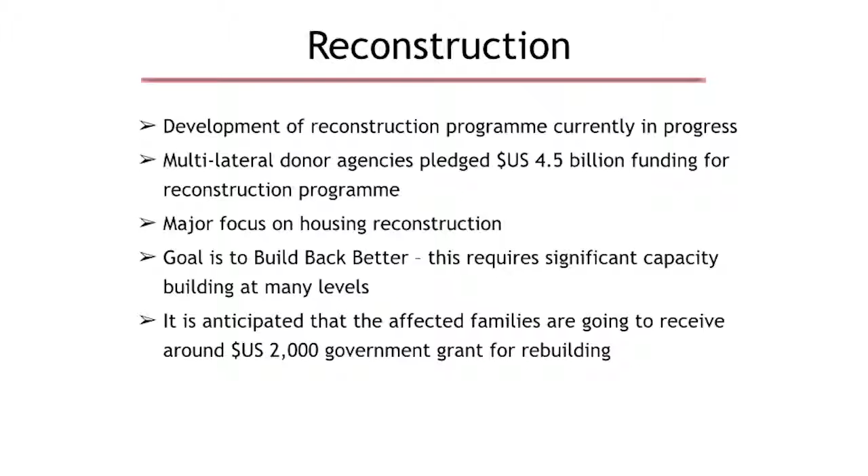When it comes to reconstruction, it's a huge task. The international community pledged almost $4.5 billion in funding for the reconstruction program. The major focus is housing reconstruction - that is where most of the damage is, not so much in infrastructure, but mostly in housing. And the goal is obviously not just to build back the same thing, but to build back better, BBB.

And that's where the whole capacity building is necessary, because it is not a simple task of going there and handing over good drawings. It's more than that - it's all about the capacity building of those who actually implement it.

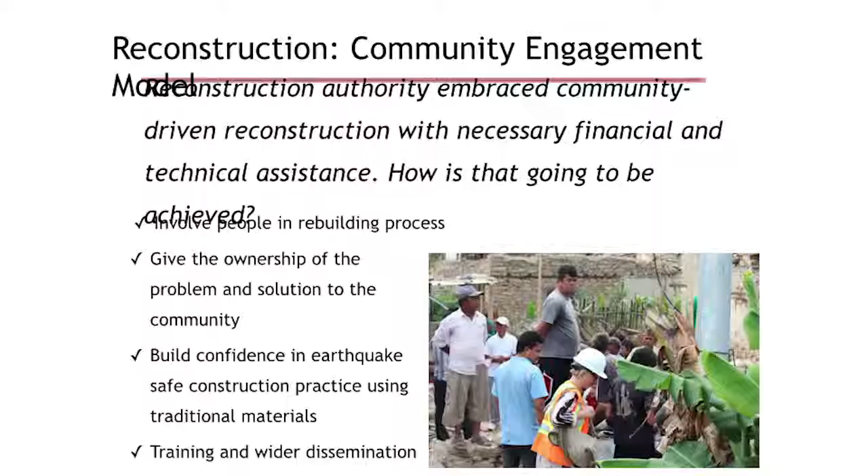A Reconstruction Authority was established there, and that embraces community-driven reconstruction with necessary financial and technical assistance. That involves the people themselves in the whole process, because it's not like our society where engineers or contractors do everything. Basically, all those buildings are built by owners, so it's an owner-built system.

They manage everything, including the configuration of the building. They get a little bit of technical assistance from masons and carpenters, or maybe at most from technologists. The rest they do by themselves. So there should be capacity building and awareness to that level.

When it comes to the whole reconstruction, they have a good thing going - mutual help, cooperation, and resiliency. But that does not help by itself; they need some resources, they have constraints. That resource is not financial resource, but technical capacity building. That's where I think the community here can offer something.

To that end, whatever we can do to raise capacity matters, because there's a big seismic gap - it's been waiting already 600 years for a major earthquake of more than magnitude 8. At that time, the reconstruction goal should be to gear the whole reconstruction as a practice, so that this disaster never happens again, even if a big magnitude earthquake hits.